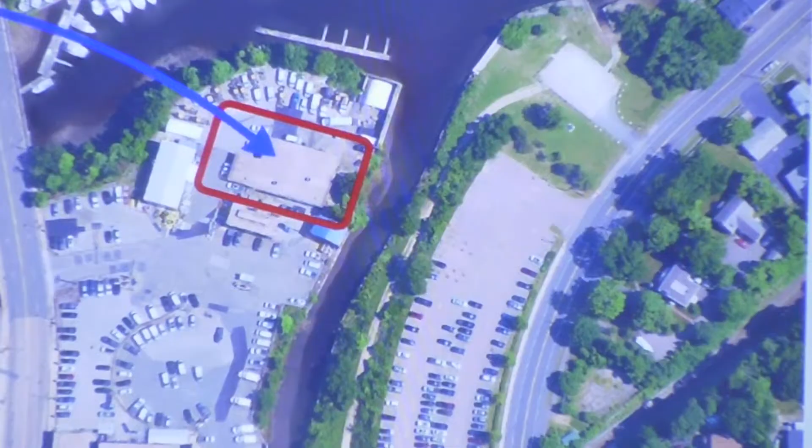So here's the garage, and I wanted to point this out for the finding.

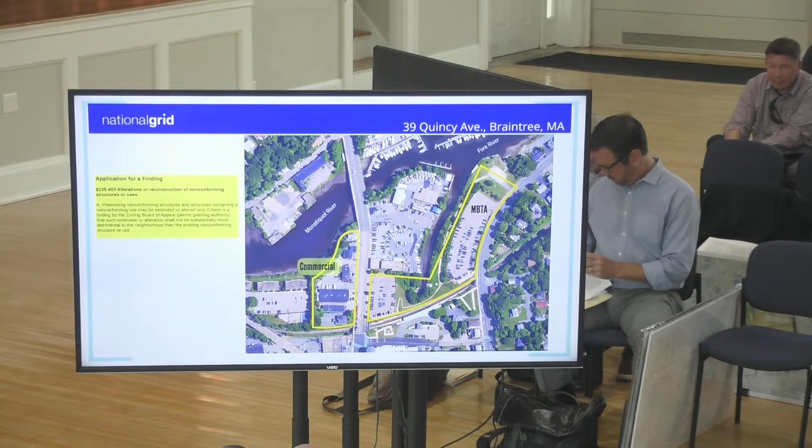The abutters are important in zoning always, and I just wanted to show that we know the abutters: the MBTA, a commercial strip across the street, some housing coming right across the river, and finally the last abutter, the marina.

With the new garage comes everything: it'll be stretch energy code, all electric, and have accessible bathrooms instead of a little closet with facilities in it. The whole building will be accessible. It's loaded with good features—it's going to be a good building when we're done.

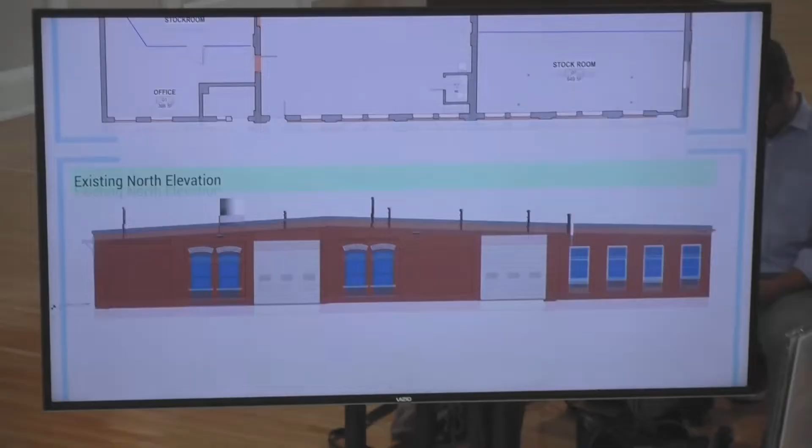This is the existing garage, pretty much wide open in a couple of places, not a lot of feature. This is the north elevation, the one you can see—pretty straightforward. This is a drawing from existingconditions.com; we did a laser survey of it before we started.

This is the new one. What's important here is it's approximately the same footprint, as near as possible in the same location. It gets taller because we need to get those trucks up, and that's really a big part of the geometry. Off to the right is kind of the people places, sort of low scale, just like the other one. These drawings are approximately equal in scale and zoom.

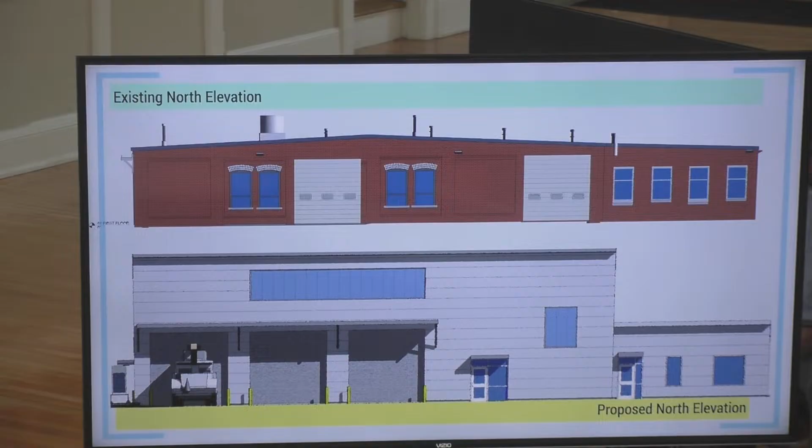And then there's the floor plan. The yellow band that starts on the lower left and winds its way up is the increased footprint, and it's towards Quincy Ave and slightly to the north.

Setback is one of our issues. We're way back, I forget the number. It's supposed to be between 10 and 15, or 0 and 15, I think, in Braintree, Weymouth Landing District. We're well beyond that. And then just the floor plan of it.

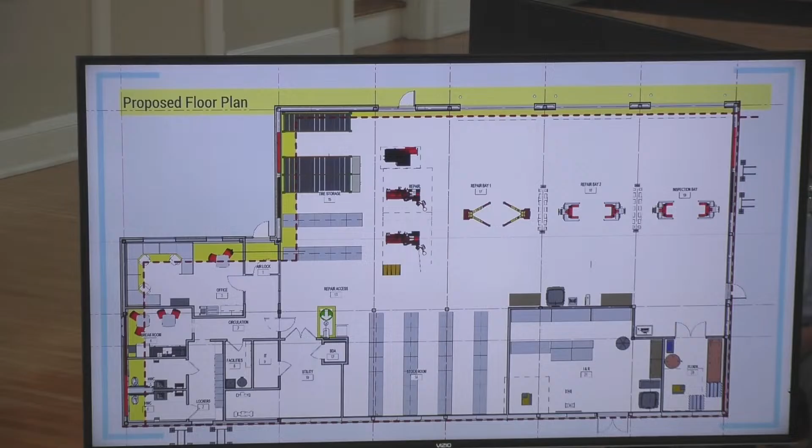Click, please. And that's what it looks like. The blue's a little off, and the color hasn't been selected. If you have a requirement, we'd be happy to listen. But just to give you a sense of what it should look like.

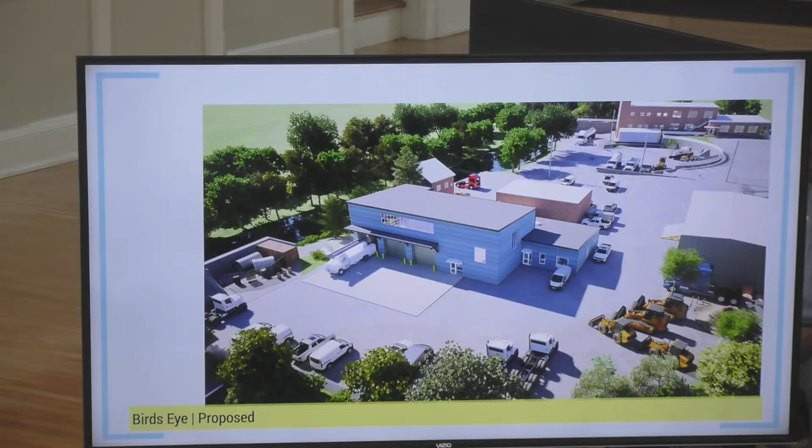Good evening. Al Trachmus from SciTech Engineering, 769 Plain Street in Marshfield. I don't know how much you want to get into the site engineering. Really, this is a remove and replace. The building footprint is slightly enlarged to accommodate the handicap

bathrooms. Everything needs to be just a little bit bigger. And as Mark mentioned, the height of the vehicles has increased over the years. We have been before the Conservation Commission.

We have received a negative determination of applicability with conditions, and we're really just replacing the building. We're not going any closer to the Smelt Brook or the Monatiquot River, and there are surrounding buildings here that we're really confined to where this building is located. It really is just a remove and replace of a very old structure.

And we will be going to administrative site plan review as well, so we're not done yet. Do any members of the zoning board want to ask any questions for any clarifications, questions of the applicant?

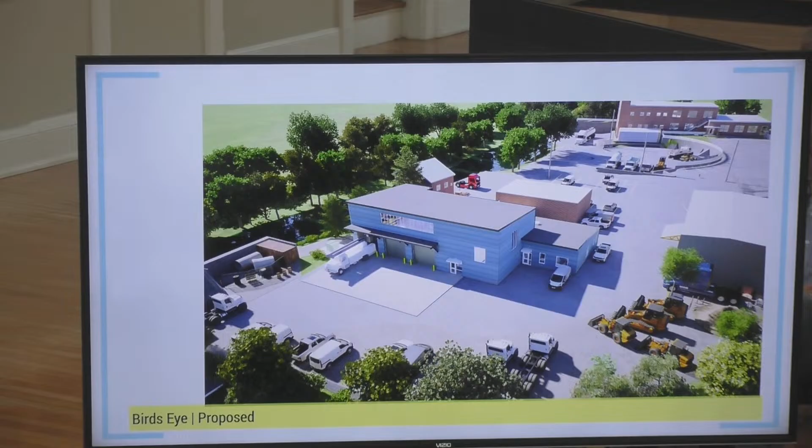Go backwards so you can see that rendering. We'll see if we can see it. Are you talking about the one in the upper right corner of this image? Yes. So that one, you had seen it, I'm going to say that's probably a 30-foot building. We have it in the model, we modeled it. And coincidentally, that building is being completely restored in masonry soon. It's not out for permit yet, but there's other activities as of right, repairs and what have you. But this is a little bit shorter than that, I would guess. I can give you a clearer answer with a little bit of time at the computer. Yeah, I think so.

The fact that this is going to be brought up to code in terms of the energy code as well as the accessibility code, I think is definitely a plus.

Any more comments? Member Perez, Cleaver? Do I hear him? Oh, wait.

Director Mitchell: I just want to also paint the full picture for everybody. Through the conversation that we had today, upgrades along Quincy Avenue are going to be made through this project. Right now there's an iron rod fence with some bent pieces; those are going to be fixed and put back together again. They're going to be repointing some of the bricks. So work is being done along Quincy Ave to kind of bring up the site in total, including masonry repairs to the historical building that's going to remain on site. So this is just one piece of a full parcel upgrade, I'm going to call it. If you do have any questions, the applicant can expand on that. But the site is being looked at also from Quincy Avenue to kind of pick up the, no pun intended, curb appeal. Don't look to too many Boston Gas repair facilities for curb appeal, but I'll take it.

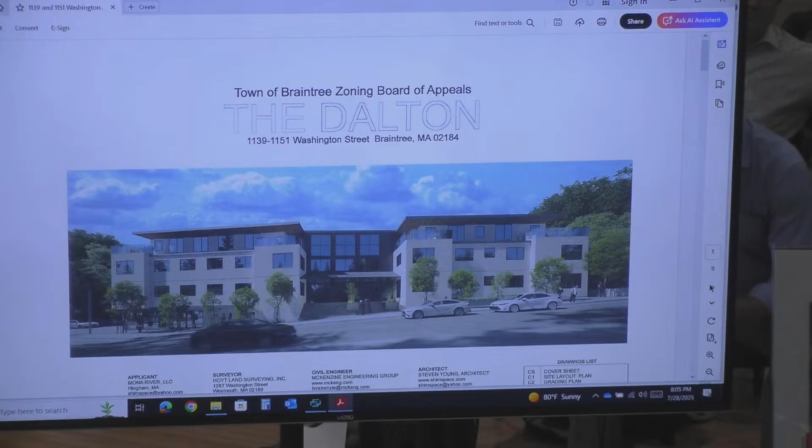Is there any comment that the staff would like to add on this project before we invite the applicant up? Want to add anything or any comment about the project before I invite the applicant up? Nope, I sent the staff report.

You have multiple positive and opposition letters. Based on that, I recommend a site visit as well as reviewing the applicant's presentation and then any public comments. Okay, so we're going to have the applicant make their presentation first, and we can discuss that, and then the public will be invited to speak based on the rules. As we said, we received 30 or more letters. All the letters are posted, and the committee has copies of everything we've been able to review. So we will not be reading them into the record, but you are here to speak.

But let's start with the applicant. Thank you. Can you hear me? Good evening, Madam Chairwoman and members of the board.

My name is Tom Cavanaugh. I'm an attorney in Quincy, and I'm here representing the applicant, Mona River LLC. With me is the applicant and architect on the project, Steve Young. In addition, Brad McKenzie of McKenzie Engineering is here. My plan was to give a brief introduction, then turn it over to Mr. Young to make a presentation, who I think would then turn it over to Mr. McKenzie to make his presentation.

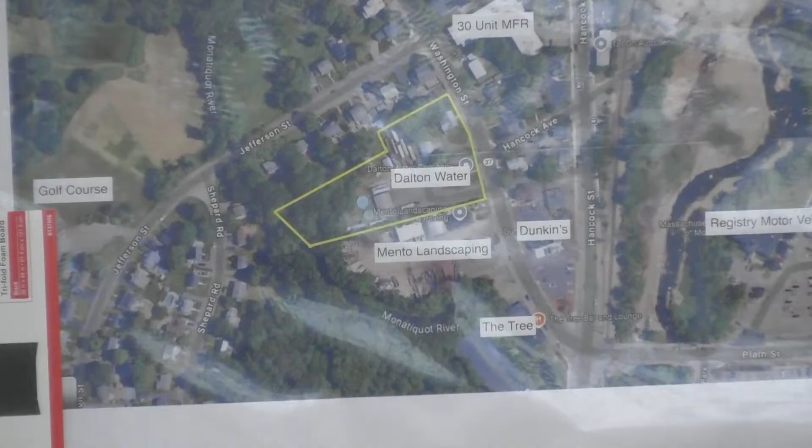As you're aware, the project is located at 1139, 1151 Washington Street. In that area, those parcels are zoned general business. This is the site of the Dalton Water. It's made up of 4 assessor lots, about 1.84 acres. As you'll see on the plans, to the rear it abuts the Monatiquot River. Currently it's a non-conforming industrial use with non-conforming industrial buildings, 2 dwellings, gravel, trucks, storage units, water pools, all located within the 100-year floodplain and the riverfront buffer.

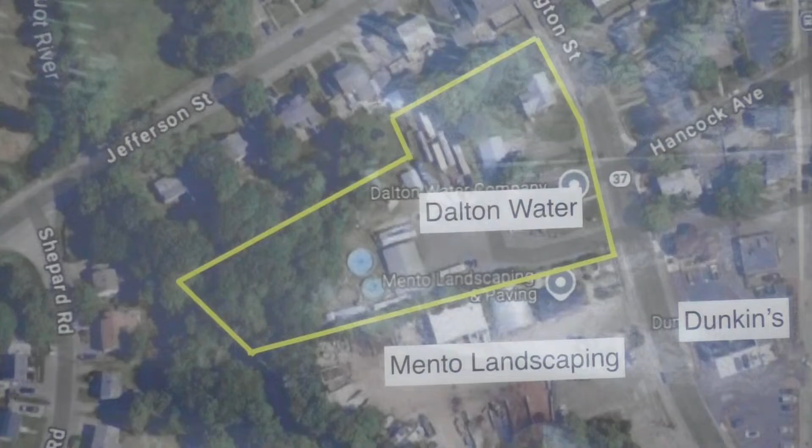The 20-foot no-disturb zone is severely degraded. The assessor lots are located within the 100-year floodplain, the riverfront buffer zone, as well as the wetlands. As you know, these are critical resource areas to the town. If you look at the lot as it's shown on the plan, it is essentially an upside-down pork chop lot.

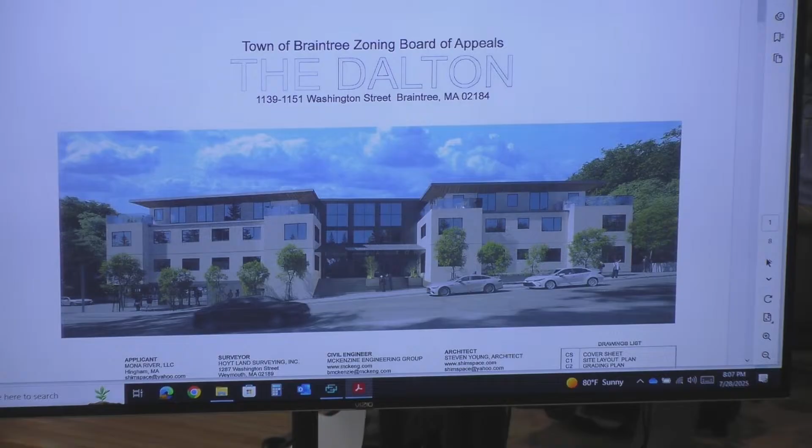The shape, soil, and topography make up the hardship here. At the northeast corner, where the lot is located at the northeast corner of Washington Street, to about the southwest area of the site, there's a 15-foot drop in grade. Along the frontage on Washington Street, there's a 10-foot drop in grade. If you look at the plans, the depth varies from 184 feet to 434 feet, and the width from 246 feet to 106 feet.

The soil conditions in the riverfront area are sensitive; it's unknown if they could even be built in, and even if they could, it could cause serious contamination to the waterfront. Unlike other parcels in this area, we're constrained by the roadway, an industrial site, the resource area, as well as a narrow building area.

In the area, there are other multifamilies, religious institutions, medical facilities, fast food restaurants, shops, Dunkin' Donuts, and just right up the street, South Braintree Square. This is what I think in planning would be considered an anchor to the South Braintree Square as you enter Braintree from the south from the neighboring town of Holbrook.

The proposal here is to raze all existing structures on the property, construct 59 units with 90 parking spaces, completely revitalize and rebuild the riverfront, and provide adequate drainage to protect the resource area, with all improved areas being substantially landscaped.

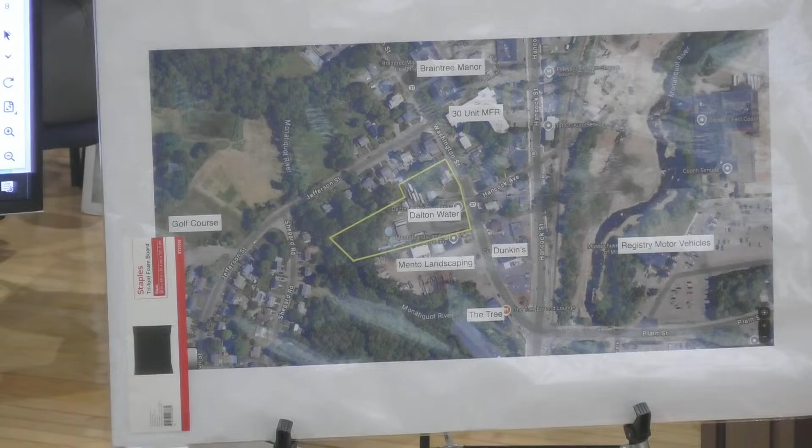As I indicated, there's a serious drop in grade, and there's a resource area to the rear. The proposal was then to make all parking on grade and bring it underneath the building.

The first story is not inhabitable. It's to capture the parking, to provide adequate parking underneath. The alternative is to put parking in the resource area, which I don't think anybody wants. So the 4 stories is to capture that parking.

However, the height restriction in Braintree is 50 feet, and we're still under 50 feet. On the Jefferson Street side, I believe we're at about 37 feet. On the side next to Mento, we're at 47 feet. So we comply with the height restriction. It's the story restriction we don't comply with, because we need to find space for parking.

The parking proposed is 90 spots. The ratio is about 1.5 parking spaces per unit, which will be enough to do one parking space per bedroom, essentially.

The parking is going to be dealt with in leasing. The applicant intends to rent these units. Parking spaces will then be dealt with when somebody signs a lease—each person gets a spot, or this unit gets 2, or that one gets 1. But the leasing will be adequately dealt with during the leasing process.

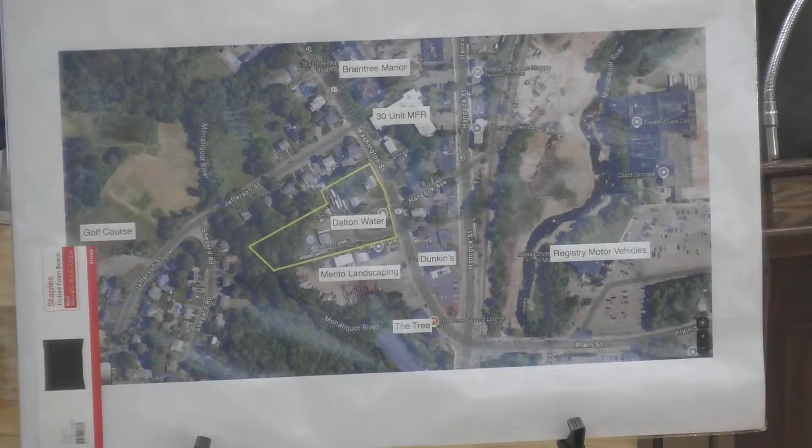And if you look at the bedroom makeup, it's 1 and 2 bedroom units. I'd suggest this will not be a toll on the schools, or the resources of the town, or the municipal services provided by this town.

And I believe that the relief can be granted in the spirit and intent of zoning. We're revitalizing a parcel that is severely degraded, a waterfront area that needs revitalization, and essentially 4 assessor parcels that need to be revamped. I'd suggest that the plan is economically strong, and I think it's something you guys should seriously consider. With that, I'm going to turn it over to Steve Young, who is again the architect and the applicant on the project.

Thanks, Tom. Thank you, Chairwoman Rubin and the board for your time and consideration tonight.

As Tom mentioned, this project is in line with recently approved projects and, most importantly, reasonable. My design has been influenced by many factors, including the unit count, parking ratio, and number of stories. These calculations, both sensible and extensive, were greatly influenced by a myriad of factors.

Those factors include health, safety, convenience, and welfare; the Jefferson Street, Shepard Road neighborhood; trip generation; the 30-unit multifamily building across the street; the 181-bed assisted living facility across the street; the Dunkin' Donuts; the industrial site Mento Landscaping next door; the Tree Restaurant and Bar; the Monatiquot River environmental needs; the zoning bylaws; recently granted relief for similar projects; the Wetlands Protection Act; FEMA flood zones; open space; Braintree's housing needs and master plan goals; interest rates; construction costs and inflation; aesthetics; financeability by a lender; and marketability.

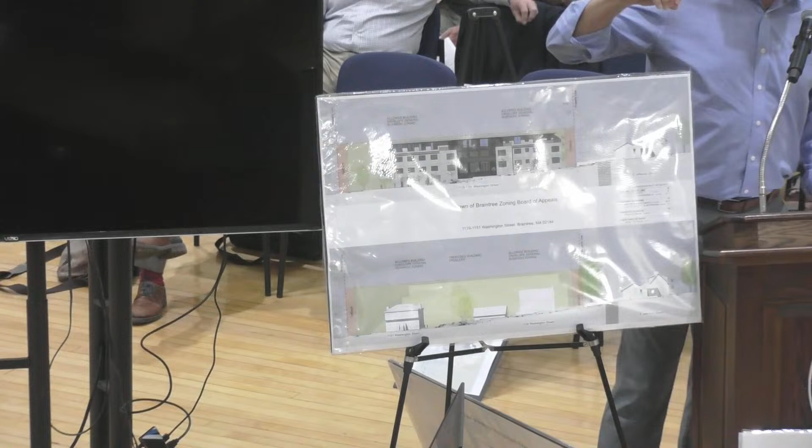When the elevations and the grading of the site are considered, they tell a much different story. This shows how the overall impact of the building's height was attempted to be minimized from a design perspective as much as possible. As the designer, the architect, I did not want it to look like one long building.

So the center portion is grayed out so that it appears, at a glance, as two buildings rather than one long one. And then the third story—or by definition the fourth story—is substantially recessed. So the design intent, whether successful or not, was for this to read as a 2.5-story building where it abuts the residential neighborhood. I tried to minimize its height as much as possible from a design perspective.

The next zoning article I'll comment on is open space. Section 135-705 requires 2,000 square feet of open space per unit, which would total 118,000 square feet for the proposed 59 units. At 1.84 acres, the site cannot meet this standard, similar to other multifamily properties in and around South Braintree Square, which are typically on smaller, non-conforming lots. In fact, no nearby multifamily developments meet the 2,000 square foot per unit requirement, and the only parcels in the area large enough to do so are either town-owned or unbuildable.

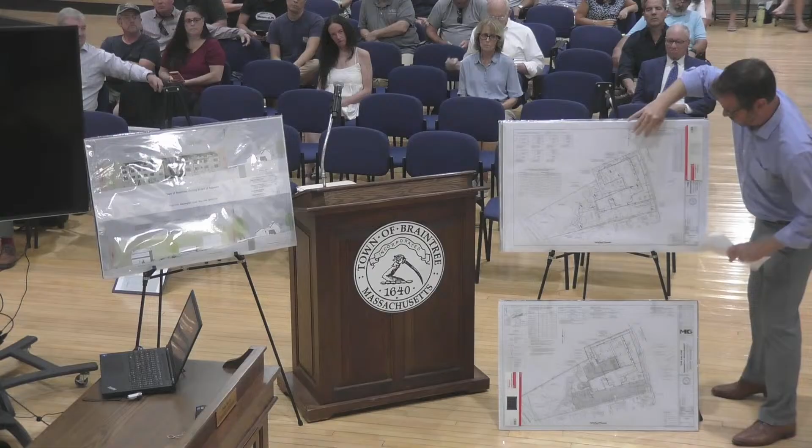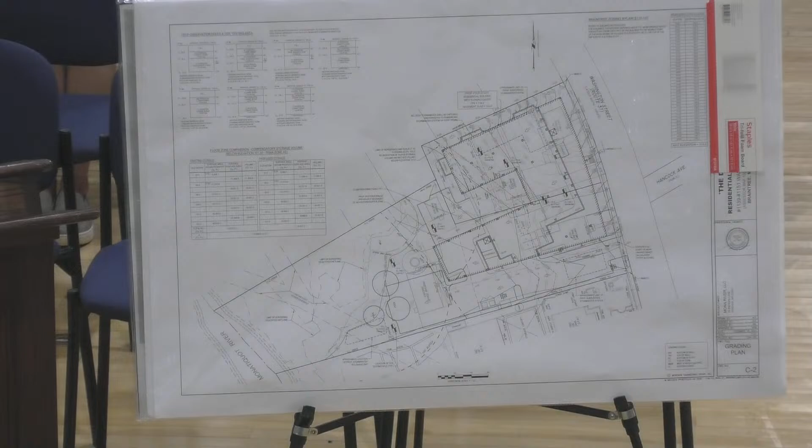As mentioned by Attorney Kavanaugh, there are 5 existing structures that currently displace floodwater being removed from the floodplain. The new design pulls the project as far away from the river resource as possible, placing it on the front setback line. The new elevated podium construction is substantially open on the ground floor to allow floodwaters to enter subsurface drainage storage systems, where it will be cleaned, stored, and slowly re-released. The wetlands restoration and groundwater remediation will additionally relieve flooding events.

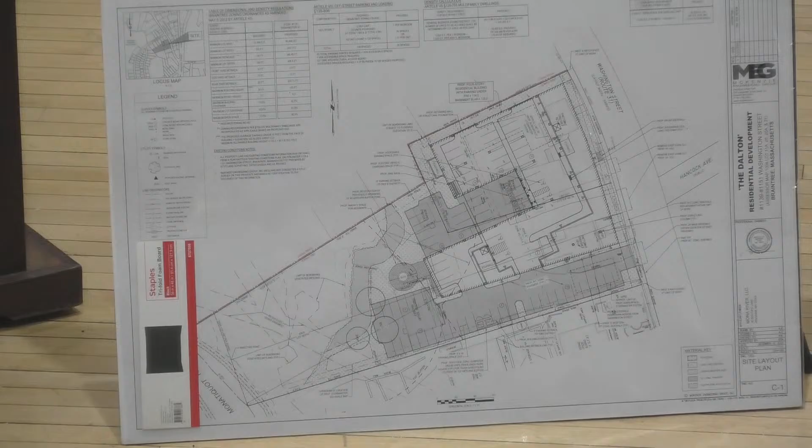Income restricted units are not required, as Braintree has no inclusionary bylaw. This project is offering 10% income restricted units as one of the many community benefits, with income restricted at or below 80% of AMI. On tax benefits, this proposal increases tax revenue from its current levels by over 5 times, to approximately $176,000 a year of additional tax revenue.

On green building technology, the project has increased the number of EV charging spaces from 4 to 33. Solar has been added to the flat roof design. Additionally, there is bike storage, heat pumps for primary heating, closed cell spray foam insulation, central hot water, and Energy Star rated appliances throughout. In closing, I have a responsibility to both the town and myself to make this project viable.

If it's not viable, or so lean that I can't provide upkeep, restore the wetlands, or maintain things like lighting and landscaping, then I'd have to ask what's next for this property. As I hope is clear, this project has been my passion, and I look forward to partnering with the town. The revised design is in harmony with, and not derogating from, the purpose and intent of the town's bylaws.

The granting of these variances will not cause harm or detriment to the public good, while providing quality housing serving the public welfare. After many reiterations, I've devised a viable solution providing environmental benefits, inclusionary units, green technologies, a 1.5 parking ratio downtown, increased tax revenue, floodplain mitigation and stormwater management, removal of diesel trucks and semi-tractor trailers from downtown being parked and serviced on a riverbank, removal of chlorine tanks from the riverbank, an outdoor reflection space for residents abutting the Monatiquot River, and meeting or exceeding the required landscape buffers for increased screening and privacy.

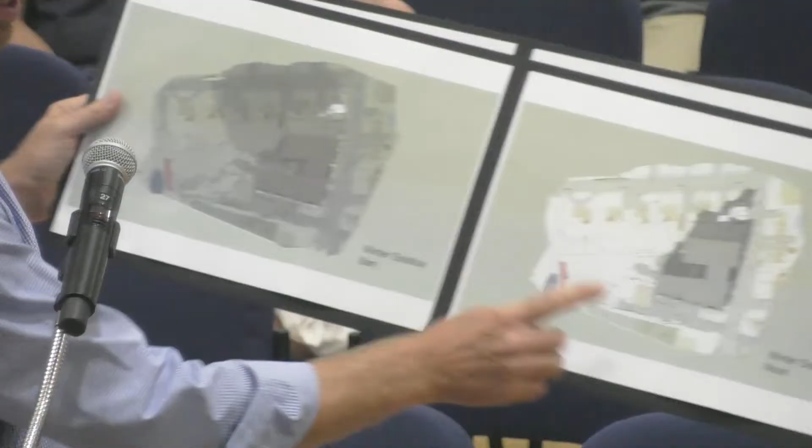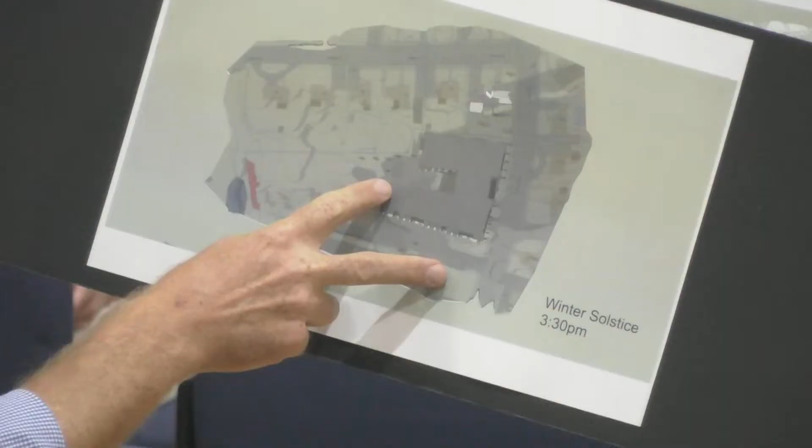We have the first board. This is winter solstice at 8 a.m., and this is showing the shadows of the building. The second example will be winter solstice at noon, showing the shadows of the building. Flip that same board over - this will show winter solstice at sunset, essentially 3:30 p.m. So that's the first set of boards, call that the winter ones.

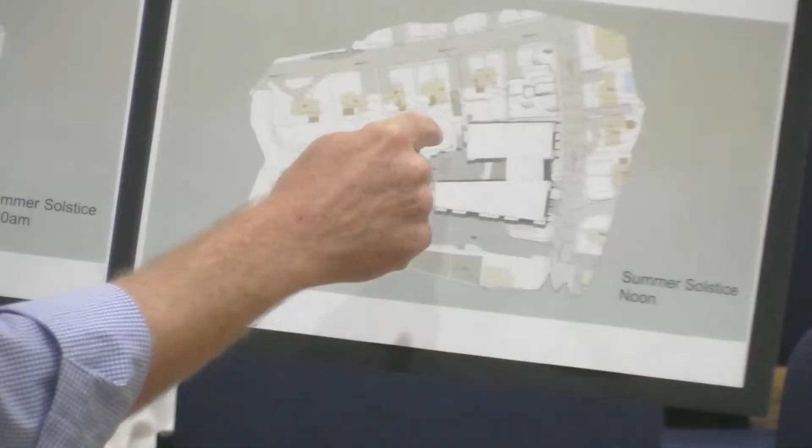The second set of studies, summer solstice, 6:30 a.m. You can see the shadow is essentially directly west. All of these are oriented, by the way - page north would be north, etc. Summer solstice at noon, the sun is essentially right above. And then sunset, summer solstice at 6 p.m., the sun is setting northwest and creating a shadow across Washington Street. So I'll bring these up. Happy to answer any questions about them.

You can show them to Member Kavanaugh.

He's got them labeled on there too, so you can see which is which. This pretty much stays on site, which is summer solstice.

Are you using the LEED or stretch codes or anything with this design? Right, so I believe stretch code is in Braintree. Is it? Yeah, oh okay. So we will be using that.